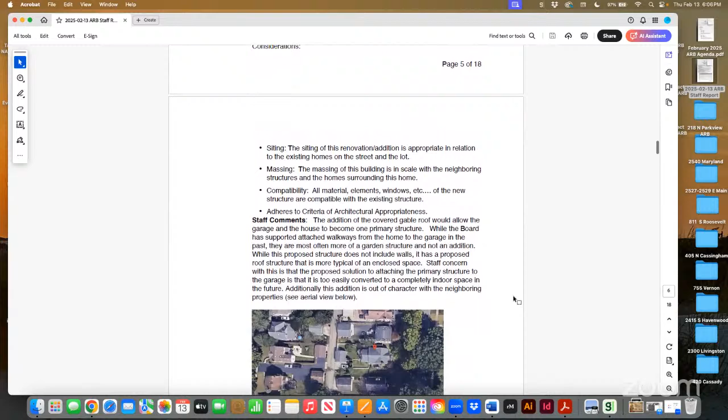Okay, on to new business. Our first order of new business is application number BZAP 25-4. The address is 811 South Roosevelt. The applicant is Eric Kramer. The owner is Katie Sells, and the applicant is seeking architectural review and approval and a recommendation to the Board of Zoning and Planning for a certificate of appropriateness to demolish the existing deck and rebuild, replace the walkway with concrete, and build a gabled covered roof from the garage to the home.

Is the applicant here for that? Thank you. And can you be sworn in, please? Can you state your name and address, please? Your address is fine, business is fine.

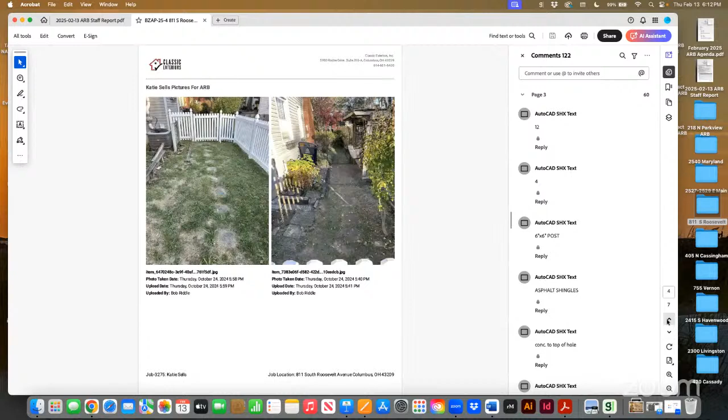We could do, even if we were allowed a solid roof, we could detach it at the house or the garage, which would separate it so it's not an attached structure. Just use 6x6s for the post and the same for the beam, but give her an actual roof that stops the water.

Karen, can you explain why this has to go to BZAP? What rule is this breaking that it has to go to BZAP rather than just in front of us? It would need a variance because once you attach that structure to both the primary house and the garage, it becomes one whole primary structure, so it would need a rear yard setback variance.

What if we didn't attach it? What if we put the cover over the deck like you explained, and then off of where the steps came off the deck, we just put a covered breezeway through it that wasn't attached to either structure? Then you wouldn't need that, and you wouldn't be going to BZAP.

Okay, but is that a better design, or is it just easier so you don't have to go to BZAP? We would prefer that you not, because we'd prefer you not have a variance. I agree, I'm all about simple. But even architecturally, that kind of goes along with our discussion — that could be the result of a better architectural solution.

Exactly to your point — you wouldn't need to if it's not attached. Do you want to speak to that? I would need to check the accessory structure code just to be sure, because at that point it's multiple accessory structures in the rear yard — you'd have the garage and then an area variance situation, yeah.

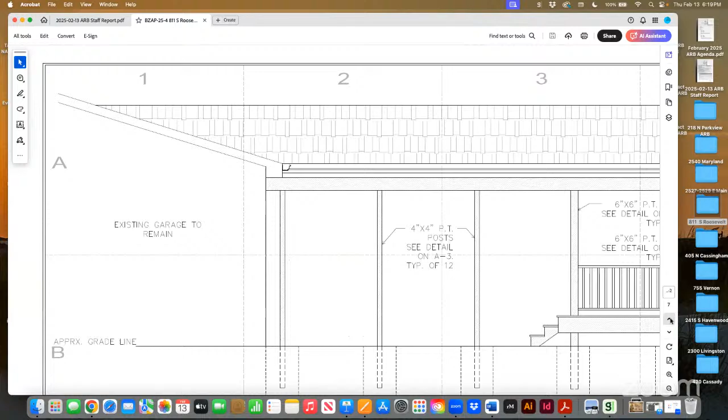Can we have that put up on a screen? I can't see what you're talking about — can you go to that, which one, can you do both? So here, your columns come up and hit a horizontal band that looks like a beam, and your fascia and gutter sit above that.

If you go to the next page, top left detail, your rafter is coming down, sitting on the beam that the column is hitting. And your fascia is lower than that horizontal beam, with the soffit there, and nothing below that but posts. So the elevation isn't representative of that detail.

Though we are going to see this detail again, I think it's a standard detail in your library — it's probably a good detail. It looks like it's a bird's mouth rafter sitting on top of a beam that just has the soffit running straight back.

I'd be interested in — I mean, this doesn't have to be an ornate structure, and we certainly wouldn't want the columns to be ornate either.

But I think the details of those are important. They need to match the existing house. So I would think that we probably aren't putting soffit on it. That was good for you to point out to me, because it's not a house. You wouldn't put... well, I don't know what you're doing. Basically, you're covering the bottom side of the rafters and enclosing the soffit, venting it. Yeah, I don't think that's against the post, probably more than you need, but that soffit would actually go to... for me, it's just trying to get into a set of drawings that represents what's going to happen. I know you have another go around of design. Yeah, we can pull the soffit out for sure, 100%.

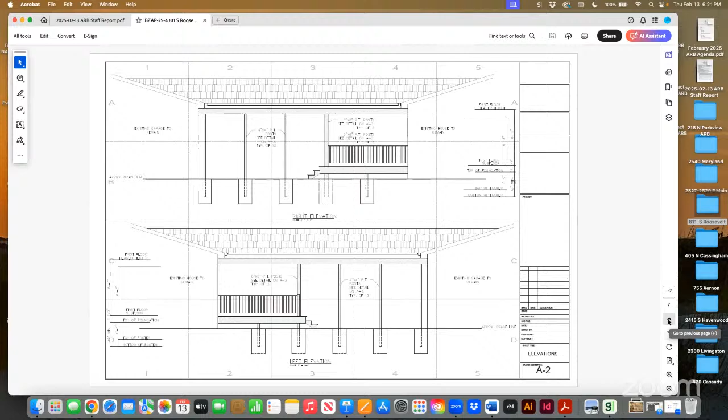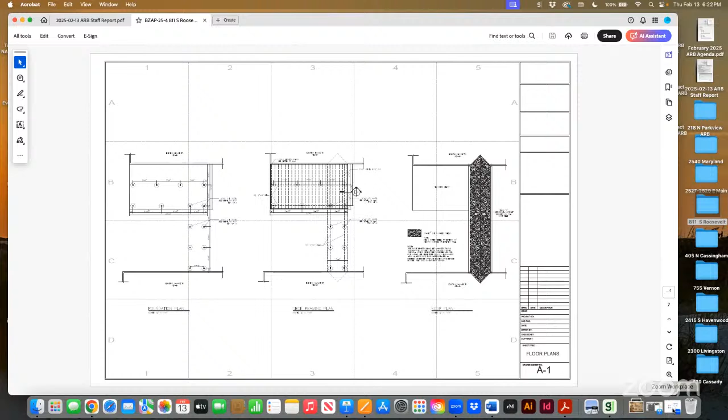So on the idea of, I agree with what Mr. Scott is saying about the drawings not jiving with what your intent is here. The drawings don't reflect the higher house to the lower garage. They're showing the eaves equal and the roof coming over equal and all that, which I know you'll revise. But why not think of it like a porch off of the garage? You can create a covered porch off the garage. It could be a gable form, it could have your piers, and then you build a porch over the new deck. The proximity of those—they're 10 feet apart—but the amenity of having this porch at the garage might be beneficial for the pets, or even in resale, to have something like that. I think it would be great. And the same thing with the deck: you reorient the deck, you make it safer, you have it covered, and they're 10 feet apart. It seems that would be to your client's benefit.

So it seems to me that it's probably going to be the way I need to go—build a studio roof over the deck, maybe do a gabled roof coming off the garage, and possibly do like a trellis in between the two. Freestanding. Yeah, freestanding, or a pergola.

Also think about the weather. If you're 10 feet apart from one porch to another, how much weather is really going to affect that 10 feet? If it's a downpour, okay, but otherwise you're not going to have wind that brings snow and all that—it's such a small area to deal with. I don't know that you really need to connect the buildings, unless there was some metal structure that conveyed people who were handicapped or something, where it had to be protected. But this, to me, at that point is more of a convenience—architecturally and zoning code-wise, I don't think it's going to fly. I would just try to convince them to have the two and keep them apart.

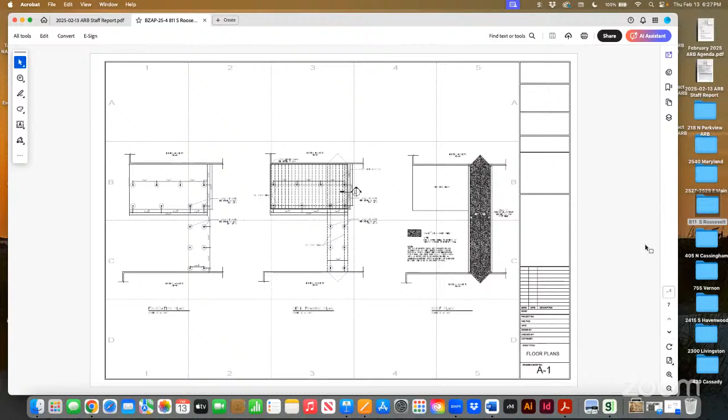This covered walkway, if I read the sketch site plan in the back correctly, looks like it's dissecting right down through the middle of the yard. So having something with a little bit of mass to it, a solid roof, is really going to put a separation between one side and the other. The owner needs to recognize that if that's okay or not okay.

I think expanding, it's kind of a simple solution. I think if you put a trellis-like structure over the entire porch, whether it has a roof on it or not, it can be a single slope with a little bit of a metal roof on it or something. I think that could be explored with an open trellis that's not connected to the porch or to the garage, extending between the two.

And just be a very light, elegant structure. And then it doesn't necessarily divide one side of the yard from the other. And then the paving you use along there could be brick pavers, could be concrete. But even exploring some creative materials to use there.

I've got grave concerns about just this gable roof that's going between the two, and then these little small columns supporting it and everything, and how that's really going to come off, and whether it's going to truly be successful or not. So I would tell you to go back and explore it a little bit more creatively.

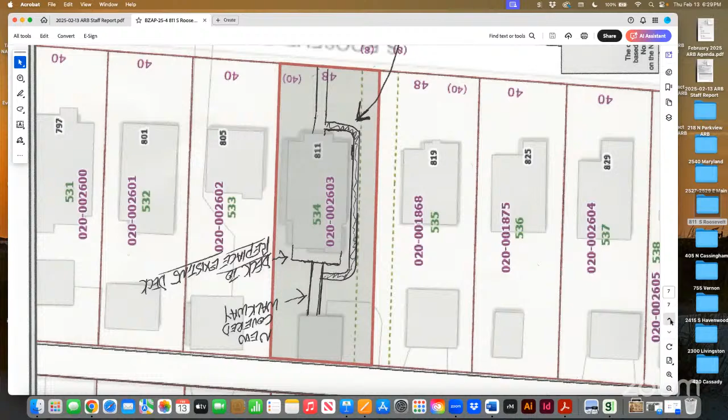Excuse me, yeah, the elevations are totally different. And it is not represented correctly in the drawings, but we will go back and make those changes.

Cool. And I agree that a straight shot roof from the house to the garage is probably not going to work for zoning or the architectural board. So I think what I'm going to do is go back and talk with the homeowner, and then we're going to redraw it to bring the porch roof out to the edge of the deck, and then build something off of the garage, maybe some sort of pergola or arbor in between the two that's not fully enclosed on the roof.

Okay, and I think she would be okay with that. We'll find out. Mr. Calhoun, are you done? I am.

I don't have anything else to add, except I ask that when you come back, can you do an accurate site plan? Because not only does that drop off, but it's angled. And trying to do that gabled roof at an angle, I don't think what you drew would have actually worked. But an accurate site plan will really help to see how your walkway can go straight from porch to porch, but not from door to door.

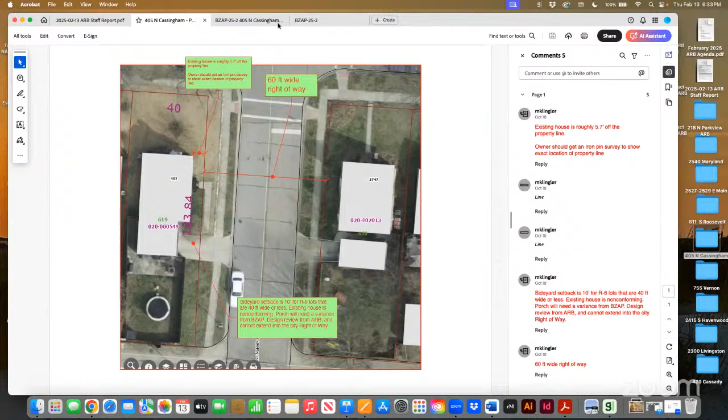Is the applicant present? Please come forward and get sworn in. State your name and address, please. Blake Floyd, 4895 West Jefferson, Kysville Road, London, Ohio. Do you swear or affirm the testimony you give this evening will be the truth? I do. Thank you.

Okay, this application is before us for the first time in front of this board. It's complicated because of the way this house is sited, and Matt, you can speak to any of this, please just cut me off if you'd like. It will need a recommendation to go to BZAP, and then BZAP will need a recommendation to go to city council. And we don't need to get into this, but I just want to set the whole picture for all of you.

At city council, they will need a release because it'll be, oh no, we're not in the right of way anymore. Yeah, we just, we are. So a bit of the overhang is. Consent hold harmless. So if anybody has any questions about that, Matt can answer, but we'll just be here talking about the architecture.

I have no issue at all about putting a front porch on this, covering over the front of this house. I think it's something most owners want to have. I've worked with the applicant since this was first applied for as an ARB application because there was not an understanding about the variance needed and the hold harmless it needed. So I've worked with the applicant back and forth on updating drawings, which were not correct at first. The house was drawn incorrectly, and I still think there's a little ways to go on the design.

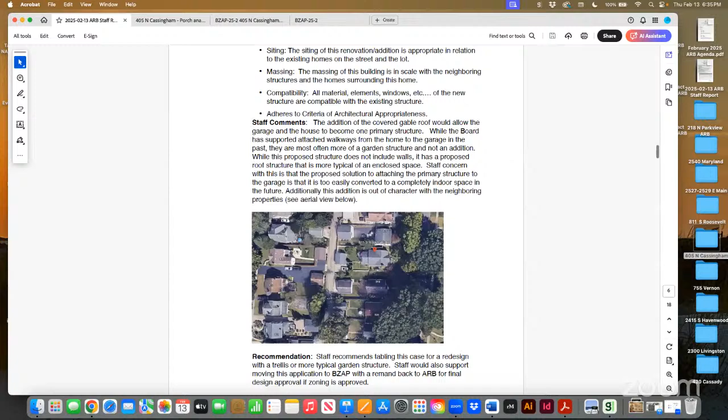I'm going to go to the staff report for a second. On the original application, I wanted to show you the house in context, which I don't believe there were photographs submitted on the second application, but it doesn't really matter. I put them into the staff report so everybody can understand how the sidewalk works, how the stone wall works, how the grass works, how the public right of way works. And we don't have a good drawing of that.

I talked to you today, didn't I? Or yesterday, about the site plan. To make sure that Blake understands that it is Blake, correct? Correct, yeah. We're going to really need that for both zoning and for city council. I was hoping to have it for today, but I tried. You're right, okay, but I think that's really critical. And that's one piece of information that we don't have here, is the site plan that really shows where the columns land in relationship to the sidewalk and the grass and the wall, putting aside all the variance stuff that's needed and the hold harmless.

I still think architecturally, we need to understand how this sits in relationship to that little stone wall that's in front and to the sidewalk.

Are you changing the sidewalk at all? No, pretty much, related to the pictures, this sidewalk is what I'm talking about. So really, it would come off the house, where the stairs are for the existing concrete. It would be roughly 3 more feet. So it's going to come pretty much, it's going to split the sidewalk in half. It's going to land right on the sidewalk in the middle of it. But you're keeping the sidewalk where it is.

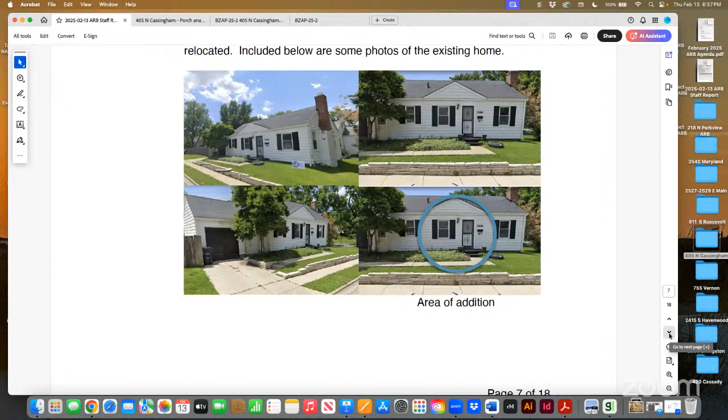Yeah, so what it is actually, you can see where the gable is, that's how wide we're going to make the deck and the porch, is how we're planning on it. So right there, pretty much from the left part of the gable to the house, all of that concrete is getting torn out. So she's only going to have a walkway from her driveway to the deck, because that's where her... I see what you're saying. Yes. Okay, so to the point, that's not clear without drawings.

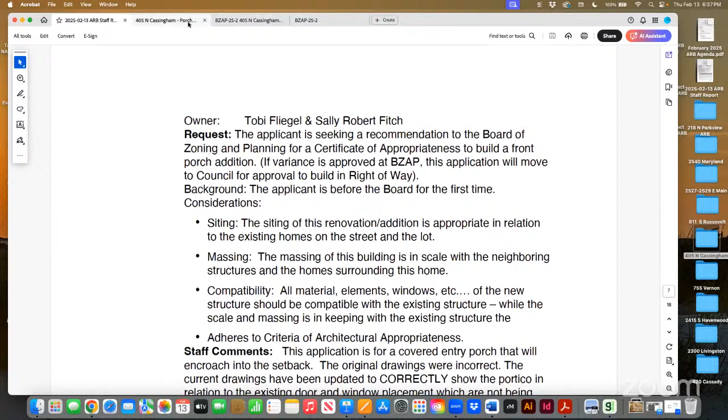Actually, there's the updated one. I also wanted to show the board this, not that it matters here or there, except it kind of does, because when we talk about the style of it, I do think you were planning on doing cedar, correct? Correct. And I do think the cedar would look better now that it's blue than if it was white, but that's just a subjective comment. But I think there's some issues about the eaves and how the treatment of the plans are that need to match the existing house as well. But my bigger concern right now is just understanding where this falls in relation to the site plan.

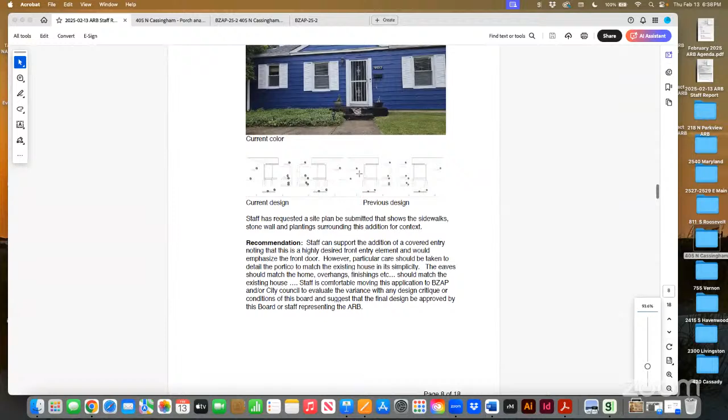Yeah, there also are, and I'm sure you probably want to talk about this for a second. I did kind of cut and paste into my staff report the previous design. The overhang seemed to be kind of proportionally more correct, but I think you wanted more.

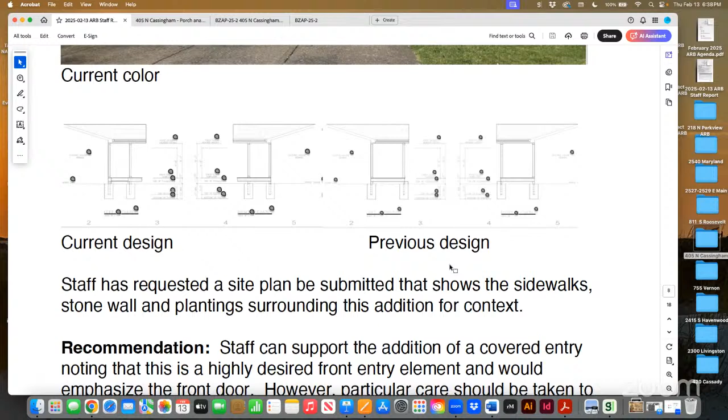Yes, so previous design, which you guys can see, long story short, the issue is she's on a corner lot. So the city right of way, she technically only owns 5.7 feet off of her house. Well, she's wanting her covered porch to be a standard 8 foot off the house by a 15-foot wide to match the existing gable that's there. So as you can see on the previous design, we just kind of had it as, hey, it's going to be 8 foot. There it is. Well, after speaking with Matt, we would bounce some ideas off one another, just to try to help with the council part of it. I think zoning would be the next meeting or whatever.

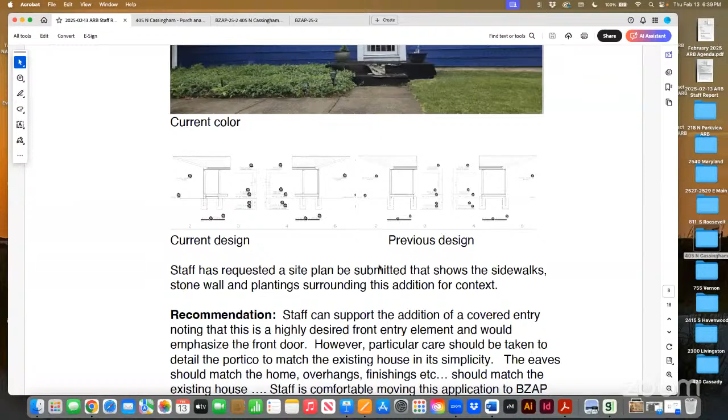We were trying to keep, as you guys can see, the footer, the post that would hold it up, actually in the ground. It would be in the right of way on the right-hand side. So what I did was change it on the left-hand side so the post would be on her property, out of the right of way, and the deck would just cantilever or hang over. It'd pretty much be floating, so it's not actually in the right of way.

I wanted to include that because I think for any of you that looked at what was posted three weeks ago, you might be a little confused. So that's the update, and that's the reason the columns are now inset.

We just try to help with the zoning portion, I guess. So let me see what else I have, and then I'll leave it to the board.

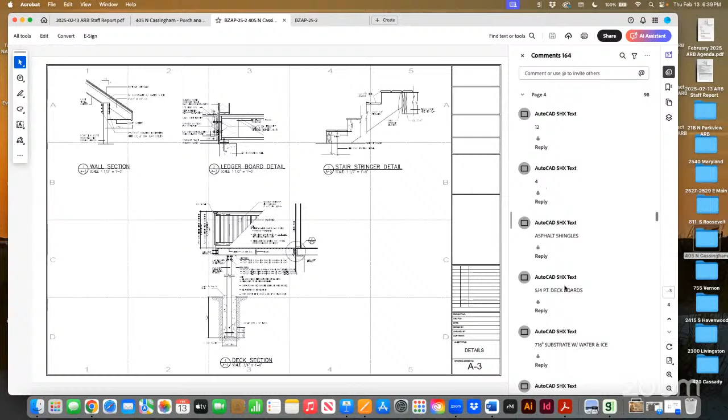Those are my concerns. I have some concerns about the design, just making sure the details of it match the details of the house. I do agree the columns can be simple, but you may want to—I'm happy to work with the applicant on beefing up the columns a little bit. I'm gonna hand it over to you guys.

Okay, is there a board member that would like to go first? I'll go first. Can I ask who drew these drawings for the porch? Who drafted these drawings? My architect did. Your architect did? Yes. There's no name on here of your architect? Is there not? There's nothing. Okay, they look exactly like the last application.

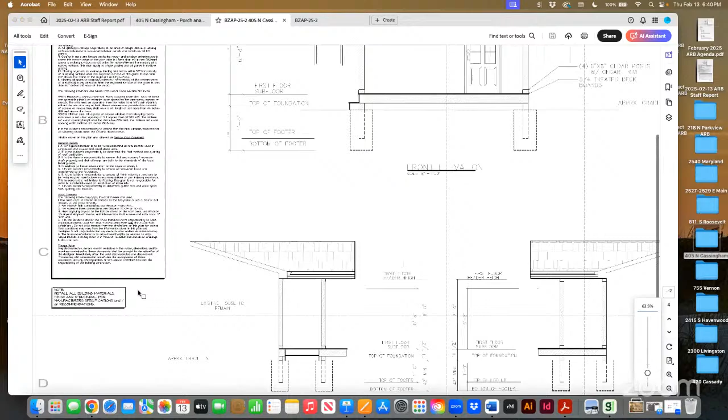The same architect? I think he does use my same architect, which is funny. When I started seeing his drawings, I was like, that looks a whole lot like Kevin. And the guy's name is Kevin, the architect. That's why I started this. But he doesn't have a title block or anything, there's no indication of who the architect is.

Or address or anything, yeah. I'm sure there's an app out there where you can do this and draw it up. Somebody could draw it up. There's no place for a stamp, so anybody could do a drawing like this with an app. I mean, heck, we're on the verge of AI for architecture. You're halfway there already with technology.

So these details are pretty much the same as what we saw in the last application for a porch. The way I see it, if this was a back deck like the last application, I wouldn't be as critical about the details, but this is a front porch.

The way it's been detailed in these drawings is not for a front porch. The house has a certain amount of character, proportions to the windows, siding, shutters, details for the gable at the front, all of that. The way this porch should engage that is by respecting it—meaning using real columns or real piers that have character, instead of just 6x6s wrapped with trim at the top and bottom.

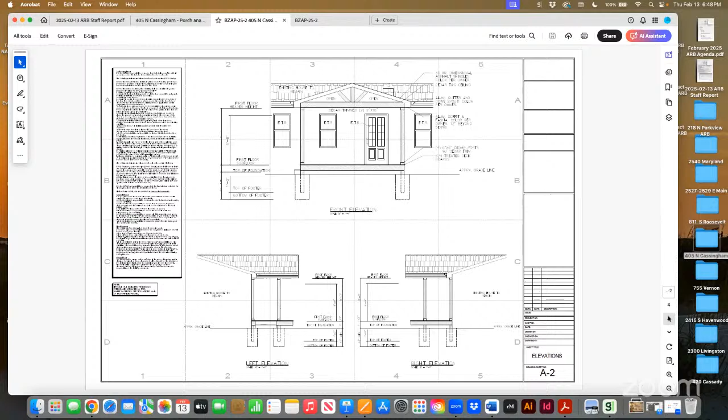But I think the thought was, how does this work? Potentially, if there's a sidewalk or if the city has to come through and dig something in the right of way, something underground that's attached to the structure, they could cut off the front of that porch if it were up in the air. But the whole right of way extends all the way up. So what I was going to say is, I don't think I quite understand what he's being pushed here to do. If the idea is to stay out of the right of way in the ground, but if you're floating above the right of way, that seems to be a little more acceptable.

Okay, that's the path we're going down here, right? Either way, you need a consent hold harmless. What's your experience? I don't think you're going to be able to build in the right of way. That, to me, is an effort and a half.

Me and Matt have both kind of told the homeowner, and she's kind of like, that's what she wants. And if she can't have that, then she don't want nothing at all. I've seen this situation a couple times in my 25 years here. It's just not something that happens, because it's putting a lot of liability on the city and on the owner. Whether you're floating above the right of way or in the ground in the right of way, it's still an issue.

It is. We were just kind of bouncing ideas off one another, trying to help with the next steps, where we're not actually in the ground. But if you're not in the ground, it goes against what Matt just said, that you can't come in and just slice the front of this porch off and get into the ground in front of it.

Based on what I was saying, come out from the house, pull the columns out, put a skirt or something around the bottom of this so they don't see where the bearing is. Which we then planned on skirting it, which kind of helps with this odd looking condition that you have with the cantilever.

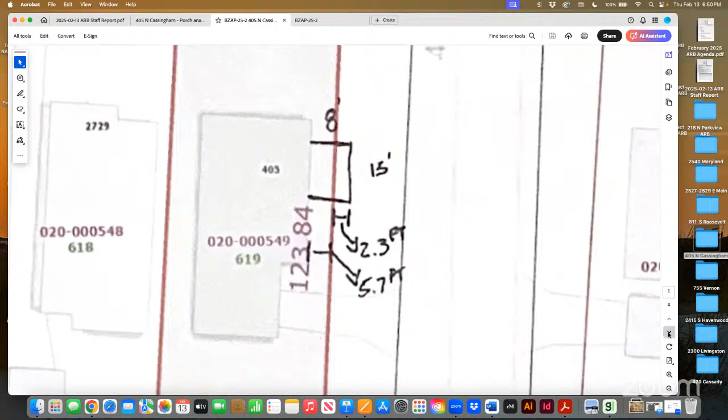There's a lot of things to work out from a design perspective. There has to be vast improvements for this to get approved from my perspective, to get my vote. It just doesn't meet the guidelines established here in Bexley. I think you can go back and explore some of that and get there. I think this right of way thing needs to be sorted out, because this cantilever piece, this architectural idea, is going to take some significant creativity to really make work.

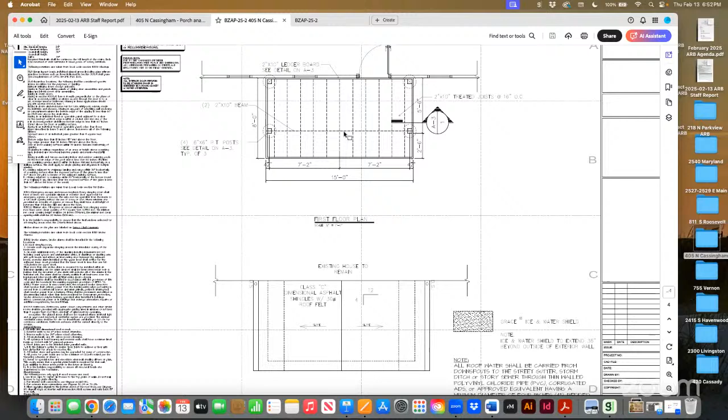And I think there are plenty of examples. A drive around Bexley, you'll pretty quickly see, oh, that could look nice, something along those lines. Stone columns, something bigger with the wood, the openness and the dividing of the beams in the top that just doesn't feel like a front porch. So I think there's some design opportunities here to really make this, even if it's smaller than what is wanted, feel like a nice front porch.

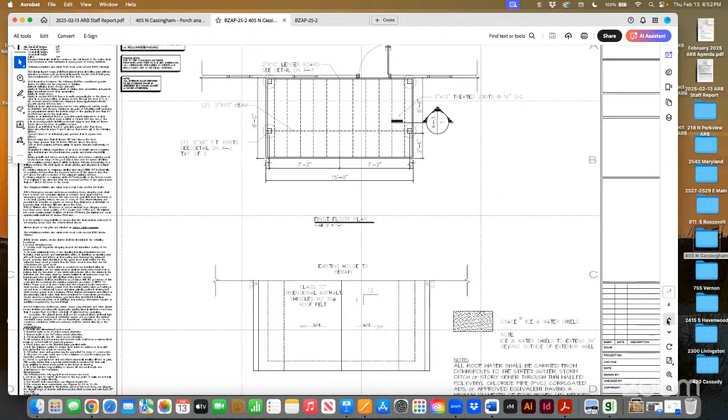If I could add anything, I totally understand and agree with what all of you have said. Keep in mind, a lot of this was literally what the homeowner sent me, and I'm just giving her what she wanted. I'm trying to make this work, and a lot of it is to budget. This is what she could afford. She found this somewhere and sent it to me and said, hey, this is what I want. Right, the open look with the cedar. Not that I was trying to disrespect Bexley's look, this is just what the homeowner wanted.

I completely understand that, because she may have assembled a Pinterest board and said, oh, I've collected 6 pictures, this looks nice, what can you do with this? And then I think maybe going to your architect and either coming up with something and going back to her and saying, listen, what you wanted is not going to fly, and here's why. However, what we have come up with is something that we think may work, what do you think of this? So I think that's probably a better discussion to have with the client.

Agreed. So one other comment, sorry, but one thing maybe to explore, and it's just going to bring more money to the project, but could the front entrance be swung around onto Columbus Avenue? You're saying, could you build the porch facing Columbus Avenue? I don't know the floor plan of the house, and bring the entrance off on the face of the building to align with stuff going down the other side of the street. But then you'd have to stay out of the right of way. Yeah, but on that side of the house, as of now, it's just a wall. There's nothing there, so I guess in essence, could we add an entryway over there?

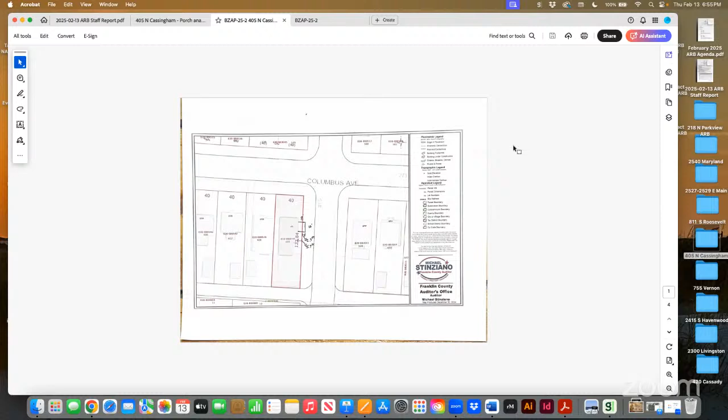So I think you should stay out of the right of way completely. I also couldn't support the design the way it is, with the cantilevering aspect of it. I don't think it's appropriate. I think it's architecturally going to be very difficult. I don't think your architect has at all thought about how this is structurally put together. Even looking at the floor plan, first floor on A1, he's got the columns, which are really piers, against the side of the house with the foundations going into the inside face of the wall, which is not possible. He has two 2x10 beams running parallel to the exterior facade, which implies that it's below the actual 2x10 treated joists for the deck.

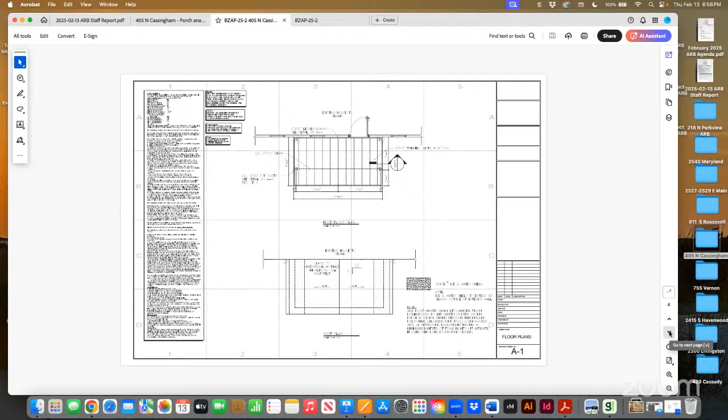But in elevation, it's all kind of in the same plane, which doesn't work. So that beam is going to be at grade or below, which I think is a problem.

I am in full support of having an actual stone, CMU, or brick deck or porch foundation that a wood deck could sit on, with a solid base underneath. I don't like decks as front porches in Bexley. I wouldn't be able to support that.

I know this is a unique condition because it's got two fronts, but looking at the option of doing a front porch on the other side of the house is a great idea, and would be very appropriate. There are many houses in South Bexley with front porches on the side. I think it's on Charles, or maybe Astor, where they put a brand new long porch along the side of the house, and that worked. I don't think they have right-of-way issues there, but that's what they did.

So it can work. And then I get to the elevations, and I'm confused again by the details, which I hinted at in the last application—at least 3 of the 4, maybe all 4. I don't see how, with the columns being offset from the edge of the gable, this is structurally supported at all.

I would anticipate there would be two beams coming out perpendicular to the facade that the columns would hold up, and then those holding up rafters that hold up the gable. In this scenario, you have a beam going across between your outside columns, and nothing's really holding up the gable. But it looks like it's an open truss.

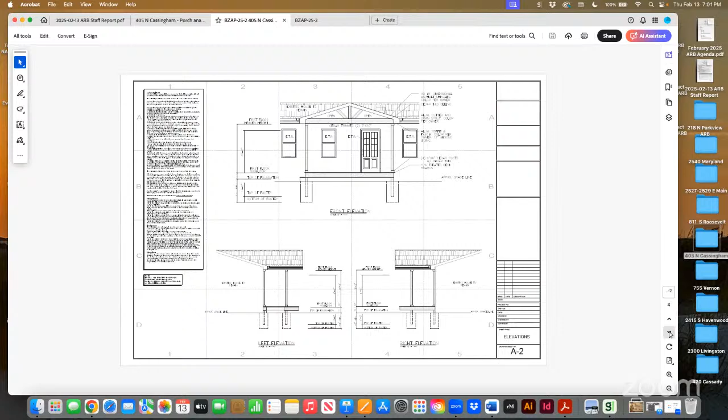Okay, we will now go on to old business. Our first application in old business is BZAP 24-49. The address is 2300 Livingston. The applicant is Bill Downing and the owner is Bexley Apartments LLC. The applicant is seeking architectural review and approval and a recommendation to the Board of Zoning and Planning for a certificate of appropriateness to demolish the existing structure and build a new 3-story residential multifamily structure. Is the applicant present?

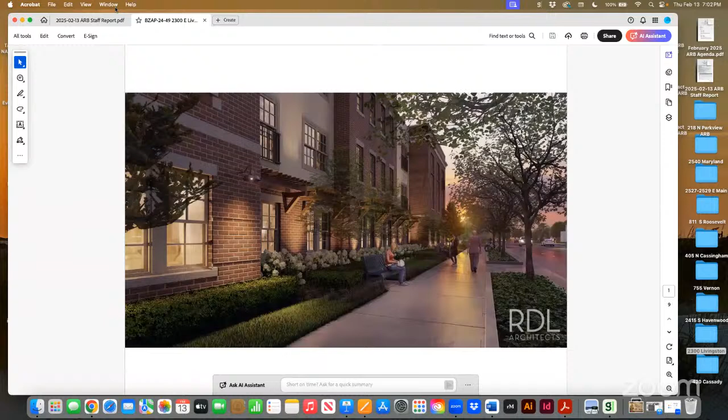Today I received an email from Tim Madison regarding the lack of public notice for the 2300 Livingston Avenue and 420 North Cassady applications. Because these are BZAP applications which have been remanded back to the Architectural Review Board from BZAP, and the Architectural Review Board is not the final decision-making board on these applications, public notice is not required, as the applications have already been noticed. However, because this is a project with much community interest, I recommend to the board that after giving feedback to the applicants tonight, the application be tabled until the March 13th meeting so that we can mail out public notices tomorrow to ensure the community has ample opportunity for input on the project. That's my staff recommendation to you all. Just wanted to share that.

Thank you. Okay, so please come back up. I'm sorry, that was just a little side note. Okay, so I know you have made some changes from the last meeting, so can you please go through and explain the changes that you have made since the last meeting?

Do you want that slideshow? Sure, that'd be great. Okay, and maybe we'll do this in two parts, because I think there was some feedback we heard that was a little more general in nature and relates to discussions held at the subsequent BZAP meeting, so I thought I could address those on behalf of the owner. By the way, we haven't met before. I'm George Tebbett, I'm from the Community Builders. I think you were gone last time. I was. Everybody else, I assume, remembers us. And this is our architect, Kevin Dreyfus Wells from RDL. I'll talk briefly about the BZAP and the questions it addressed, and then let Kevin take over on all the design stuff.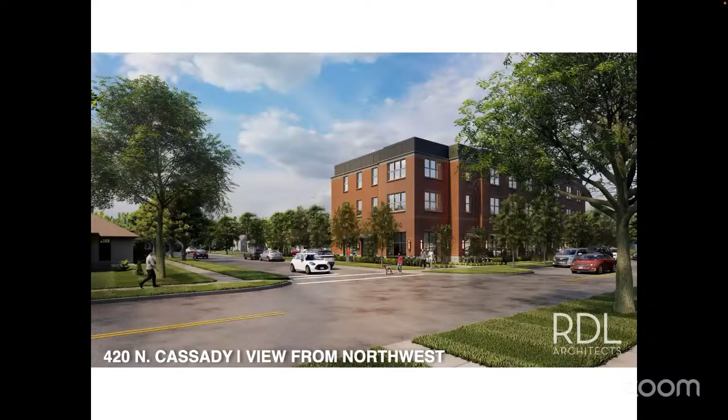I assumed so, however you like. That's the one I just read. Yeah, I thought that's where I heard something. Oh, he talked about 2300, so I assumed that's where we were.

Great. So we heard loud and clear your comments and suggestions, and have made some pretty substantial changes in a number of locations. We really tried to listen carefully and respond to all of those. I think everyone's familiar with the context—other than that we are surrounded with residential properties to the east and southeast, so we're sort of in line with that. Obviously, as we talked about last time, we do have a constrained site. We have a minimum program and yield that we need to meet, including certain unit types.

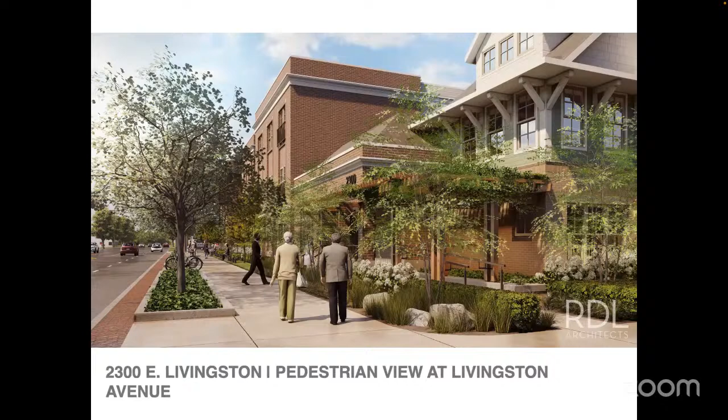This is the proposed building entrance. As we get to the plans, we'll see, but we've taken that corner unit, and there were some questions about the proportion of that. We've pulled that back and widened it so that it has a much wider proportion when viewed from across the street.

It sets back and gives a little more room to that front entrance. We've taken that front entry element, which was previously kind of a continuation of the Francis Avenue architecture, and given an identity that's really much more in line with the character as you move west down the street, matching that same brick and trying to make it more of a transitional element. It's gotten taller, with brick piers there.

And then we've extended that entry experience over that open space with a pergola. That pergola continues in a very similar character as you go all the way down the street. There's about 100 feet of pergola trellis as you go down, trying to bring that down to a human scale.

We're being very intentional about lighting, to light that first floor experience in the evening. We've added a tree guard type element along the edge of the sidewalk with posts and a chain, which is an element coming out of the Main Street pattern book.

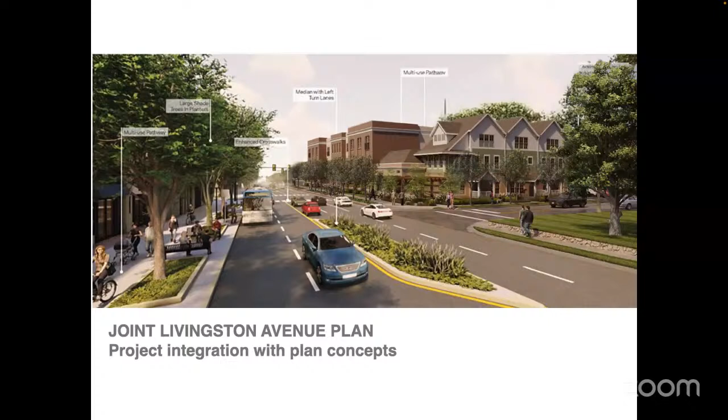We did want to address the question of how this fits into the joint Livingston plan. This is the page from that plan that kind of captures that streetscape character, although not in this location. In the next slide, just as an illustration, we dropped our project into that streetscape. This is obviously a kind of crude collage, and we know that doesn't occur at this site, but we wanted to at least show that streetscape character.

We don't know what's going to happen across the street. That's out of our control. But this is how that fits into that Livingston streetscape.

The overall floor plan, in terms of the number of units and their arrangement, is fairly consistent. But again, at that corner, we pushed that townhouse type unit back and broadened it, which you'll see in the elevation. And move on.

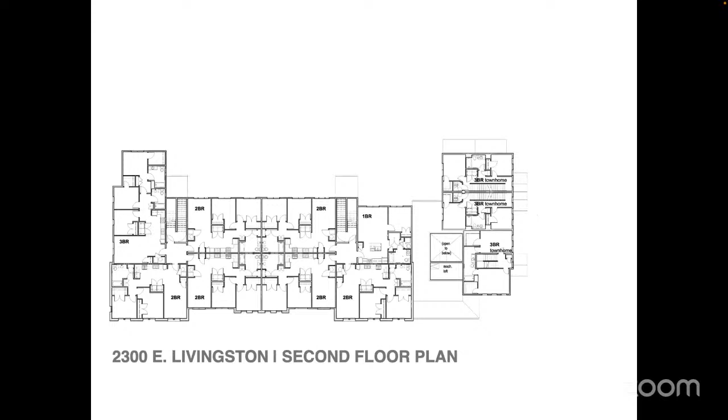Between the two end caps, as you've seen before, what was previously kind of a continuous expanse of siding - we've pulled out that middle element and changed some window patterns. We've also introduced Juliet balcony railings at the living rooms of all those second and third floor units.

We had previously had a brick arch there. You can see we've treated that differently - we stepped the wall back a little bit so that we really have three very similar units of geometry. We've also expanded those third floor window proportions at the top.

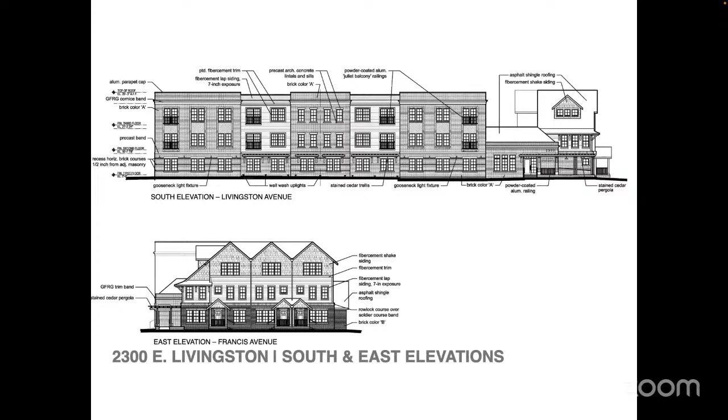Anything else? I think that covers the primary changes.

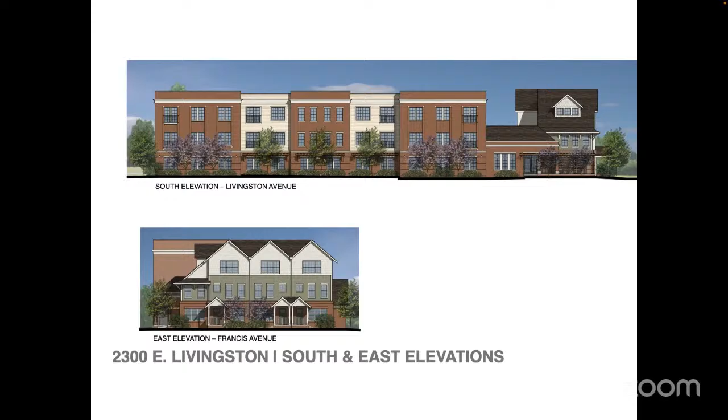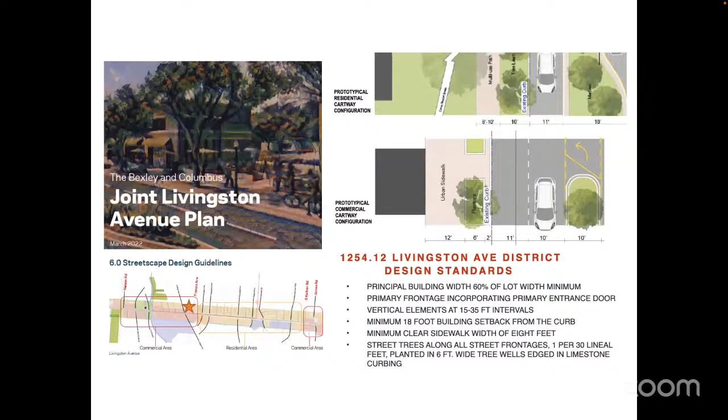I want to say, I think the design is much better. I appreciate you pushing for something that is compatible with the neighborhood. I do appreciate that. Can you make the bigger piece bigger?

My questions are about the parking and fencing next to our property. Because you probably can't tell, but the whole property line currently is all the same level of grade, there's no change. But as you go back to the end of the property, there's a big grade difference. So when you see all those cars facing our property, which is not very wide, it is deep, but I have some concerns about our safety on the other side, especially where the level of the ground is the same.

When it's different, I don't really have much of a problem. Currently there's a tree, and the grade almost to that second tree is completely different. Right now there's a garage, and the grade is completely different there too—significantly different, so it adds an extra layer of safety. But when I look from that tree in the middle over to where we come out of our house, it's all even.

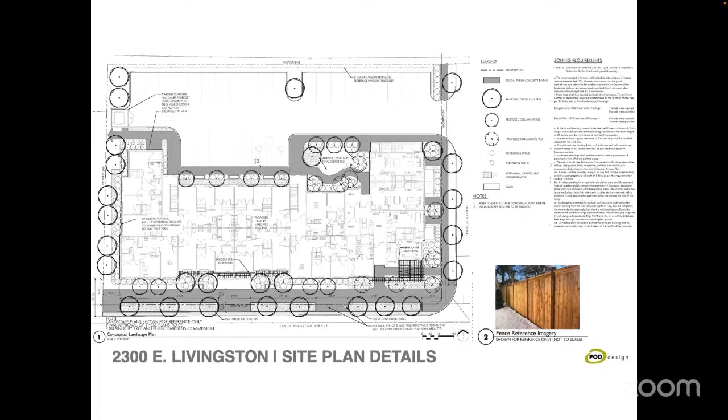Does your driveway line up to that lot line? You're not showing it at all. Yeah, that's our entire driveway. It goes to the garage. I think you can see the garage right here. Keep going. Right there. Gotcha. That's helpful, thank you. I think you really need to see the whole context.

No, I really don't, and the back part, we generally do gardening and not much activity. But we call it the three yards: the front, the middle, and the back. So in the middle we do a lot of activity because it's a nicer area. So I would want to be protected, and I don't think I should have to come up with something to protect ourselves, but I will if I have to. And I'm just wondering, is there something we can do?

Okay, thank you. Is there anything else? Yeah, I was wondering what kind of feedback I might get. Well, I have to go through all board members and stuff, so we won't come up with an answer for you right now, but we've taken down your concern and we will try to address it as we proceed. So, thank you so much. Okay, thank you. Appreciate you.

Okay, is there anyone else in the audience that would like to speak about this application? Okay, I will go to board members. And is there a board member that would like to go first? Nobody's making eye contact. I'm picking Mr. Hall. Fine.

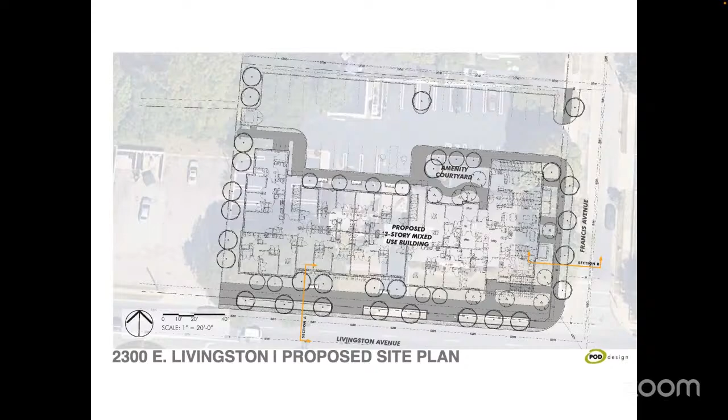I would say that you have this 8-foot wood fence going around the perimeter, and all it takes is somebody slapping it in reverse, hitting the gas pedal, and slamming through it. I don't think it's realistic to think that somebody's going to have to go back and forth two or three times to get through it. I really don't see that as a justification. I don't know if that would occur or not, but I think with her residence being next to it, that needs to be addressed.

A quick clarification - I may not have said this as clear as I meant - but in addition to that fence, there is a 6-inch high poured-in-place concrete curb at the edge of that pavement. So how often do you see cars that pull up in front of a building and then all of a sudden they're inside the building, never really 20 feet away getting 60 miles an hour to get in? That's my point. They can jump the curb and go through that fence and end up in her side yard. So I think that wall needs to have some structural integrity to it - that's my point. I don't know what that is, but you all can figure that out.

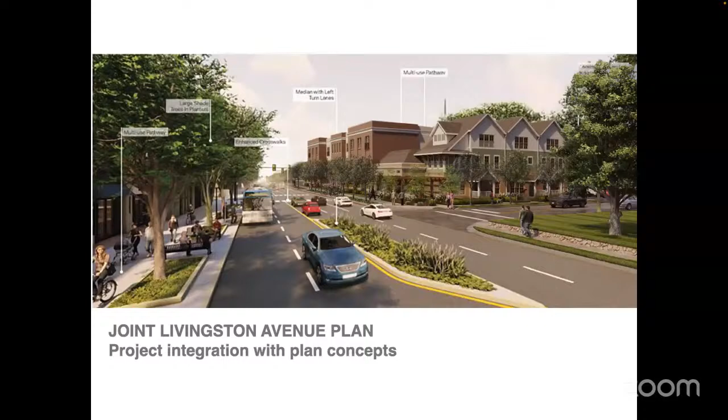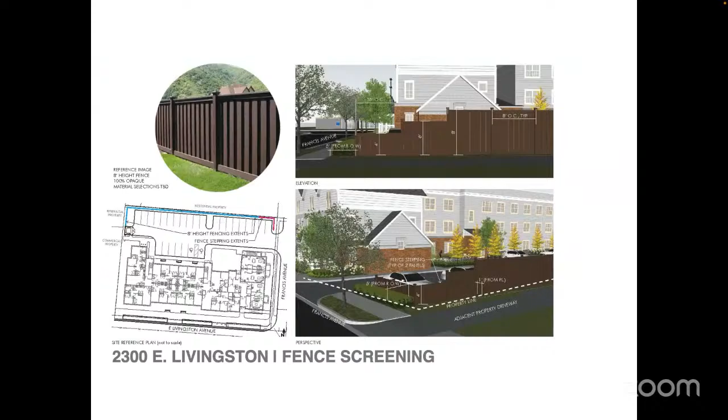What I would suggest, if we could go to not the joint plan view, but the other perspective view, the next one. Well, now I get back, there's another one. Just the main three-dimensional view of that. Must be back at the beginning. I think you'll find it towards the end. I'm looking at the... different, it has RDL in the corner. There you go, that's the one.

Okay, so I don't think we ever had any issue with this. This, to me, feels good. I like the porches. I like that you got rid of that strange brick arch thing that was there, it just felt sort of uncharacteristic. These do feel a little more Bexley-like. It's all about the details at this point.

We don't want it to look cheap, so that's going to be a lot of detail work with the design consultant. I would really like to see this again, honestly, because I'd like to see those details expanded and elaborated on. But this is not resolved.

What I would suggest is that you actually consider doing a gable form on this elevation, not trying to create this dormer, this sort of bungalow style dormer up here that just feels very strange, as strange as the large sweeping roof you had before. So if this could turn into a 3-story gable where it's not quite something like this, but you're turning the corner and now you're starting to relate to these things, even though you're going to have clapboard, you're going to have gables, but all of this crashing, it feels like I'm...

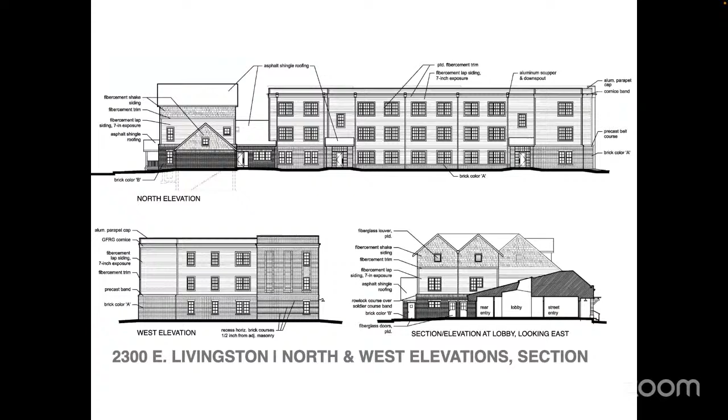A7.0, I have no issue with those here. So here you have this lovely brick detail wrapping, but then on top of it, you put a stone sill. That's odd. It's more material than you need for a detail in a sill condition. Either you make this stone, transition from a rowlock brick to a stone, and pull this up a little bit so it's right under the window, or you just eliminate the stone and get the window down to the brick. But the two of them together doesn't make any sense.

Our reason for doing that, and our preference, is to provide a projecting drip that doesn't interfere with the consistency of the brick surround. That's actually a detail that the Trinity Seminary building has exactly in that same manner, probably for that same reason, so you don't get that streaking of oil down the brick. But I don't think they wrap this under the stone. They do actually. They do actually. Okay, well, it's very odd to me.

This makes sense right here, but it seems to me that this brick would turn and transition maybe into a projected stone, rather than having them on top of each other. But if that's what's over at Trinity, it just seems odd to me. But that is one of the details that I was looking at.

But the cornice, the alignment at the top and the alignment at some point here, I don't know if it's the intention for all of it to align, but I think in the drawing, if you zoom in, there's a misalignment there of some kind. And I don't know if this is a projected line. So there are some places where I'm looking at things that need to be refined. And I'm not going to spend a lot of time on that because, in my opinion, that whole juncture of the Francis Avenue building with the one story still needs to be resolved.

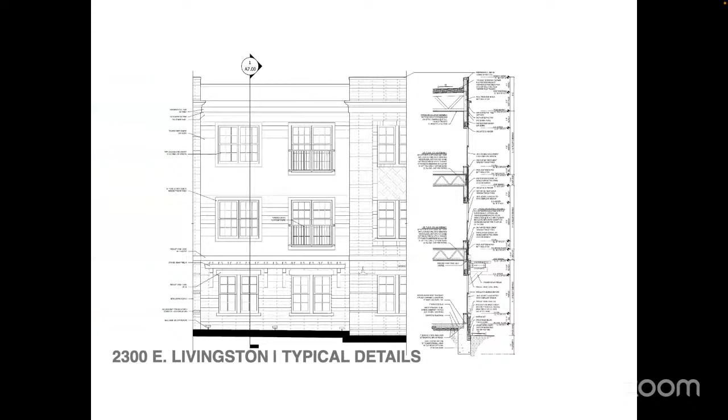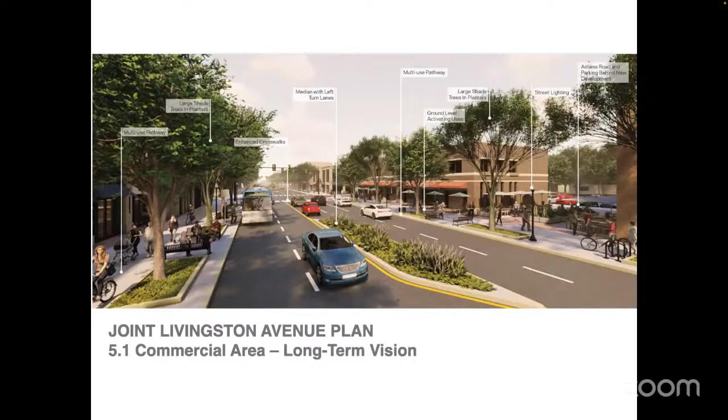Is that just a drafting issue? I think this is the landscape architect's depiction. I think the crown of the street is just a little more exaggerated than actual. We don't really have that scenario; we have the street down and there is a crown to the grade of the street where the middle is higher than the curb, as any street with drainage would be, but it's a 6-inch curb and we don't have any intent of changing that relationship. Okay, that just seemed alarming to me the way it was drawn, so okay.

I have nothing else from that. Oh, I did have one other comment. On the tall 3-story building where it wraps around and you have the connector link, was there any consideration of putting some brick detail or something there that would mimic small windows, just on that high area up there? I just thought maybe some fake windows or something would give you some details instead of that plain brick wall.

We did look at that, and in the relationship with that transition element roof as it currently stands, it felt a little bit squeezed. But I would ask if other board members have any feeling about this suggestion, which I think is a good one to explore - maybe removing that sloped roof element would expose more of that wall and open up a better opportunity to provide brick detailing. That's a great idea. Yeah, I would support that.

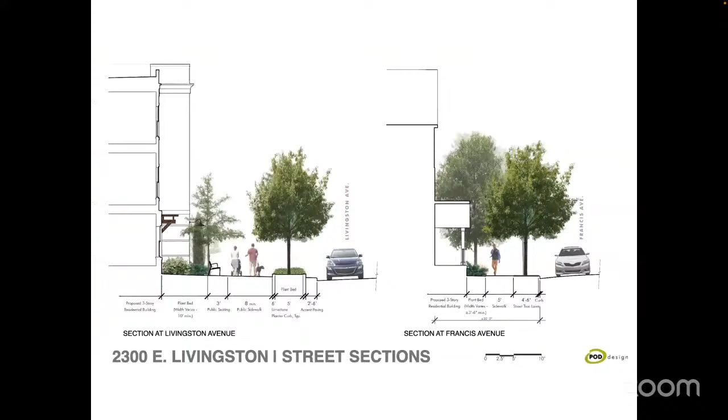Okay, our last application for tonight is BZAP 24-50. The address is 420 North Cassady. The applicant is Bill Downing. The owner is 420 North Cassady Ave LLC. The applicant is seeking architectural review and approval and a recommendation to the Board of Zoning and Planning for a certificate of appropriateness to demolish the existing structure and build a new 3-story mixed-use multifamily residential structure.

Okay, we do not need to swear in because we are already sworn in. So if you would pull that one up and go through the changes that you've made from last month. Sure. The changes in the comments were at a smaller and more refined scale level. Our responses are basically that we've incorporated them, at least as best as we understood them, exactly as they were suggested. We can move through the street views.

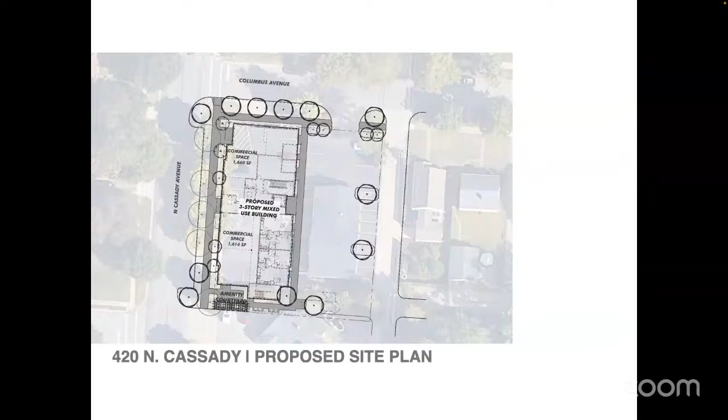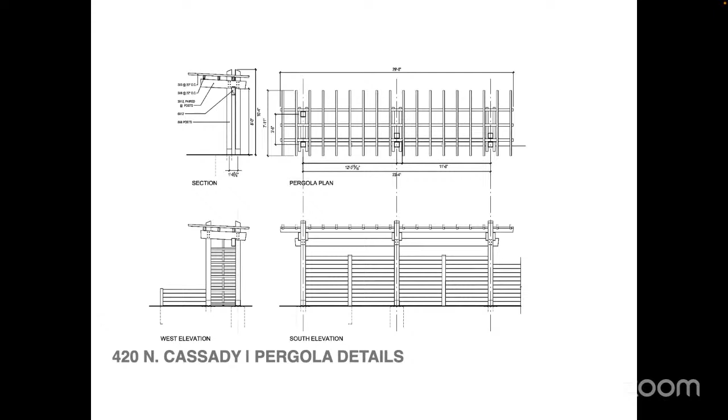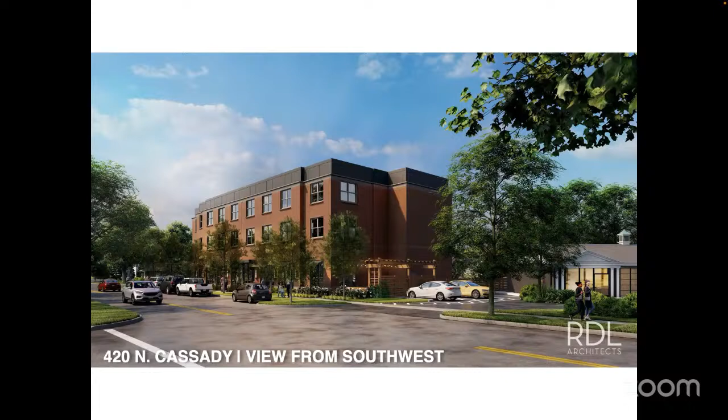We provided a little additional detail on the intended pergola at the corner of that south patio, off what was intended to be the senior center, intended to be stained cedar of some fairly large dimensions. I do want to note that these are the renderings that you saw the last time we were here. We have not updated these, so those refinements and details just didn't really show up until we got to two-dimensional elevations.

We have taken the storefront, where we had a soldier course, and extended that around the window to frame that opening. We're reverting back to the previous detail we had back in 2022. The horizontal belt course had been a single soldier course; that's now a triple soldier course. I think that was really primarily the changes on these elevations.

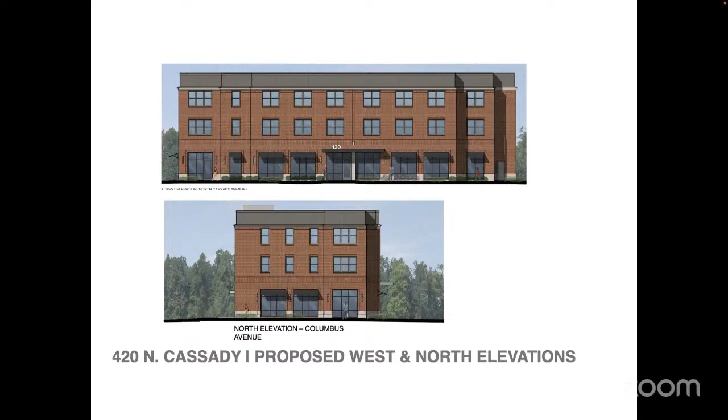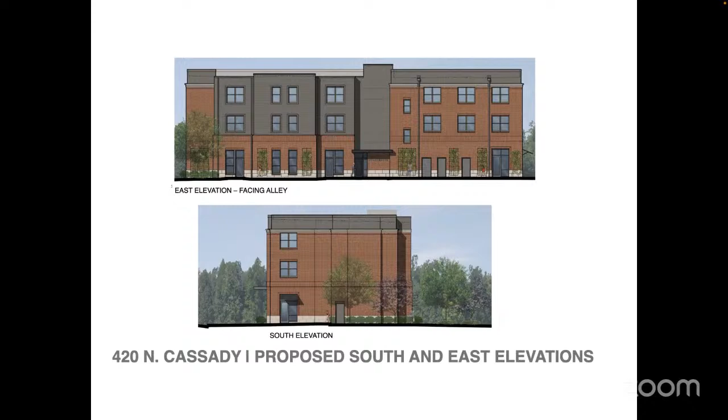Beyond that, there were some requests that we provide details not only of the pergola but of the trellis elements facing the parking lot, and our wall section has details of the intended awnings, which is a powder-coated aluminum frame with a fabric awning - a very simple slope with no free swinging or rigid valance there. We also recall a comment to extend the canopy an additional amount, and we've done that as well.

Okay, thank you. Is there anyone in the audience that came to speak about this application? Okay, seeing no one, we will go straight to the board. Is there a board member that would like to go first?

Sure. Mr. Scott: Great job. I'm in support of the project.

Is there a board member that would like to go next? I'll give you the fastest one. Nice job, Pete. That is the shortest one ever.

I really appreciate the detail that you've added. I love the triple soldier, I love the surrounds on the windows. Really appreciate all that work. I think this is going to be a great example in the future, with the land use strategy plan for North Cassady - this will be a sort of bellwether example for future development up there that will be similar to this.

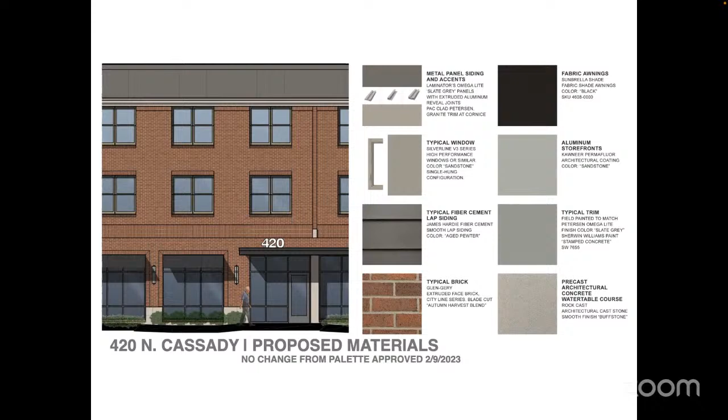This is strange - I won't go into all the history of these projected soldiers over windows, but it stems from an old Georgian look, particularly in Virginia, and it somehow got translated into New Albany, and then all of a sudden everybody started doing it. You'll see these things everywhere, but that is not the way you do a soldier in brick. You will note if you zoom in on that elevation that they're noted as flush. Okay, great.

The other thing is the precast concrete base. I don't know anywhere in town where I've seen that successfully done. They weather terribly - the soft joint between the precast and the brick goes bad very quickly. The masons in town, I'm sorry to say, are just not good at this. I would recommend you do a lighter colored utility brick instead of the precast. There are just too many examples I've seen in Upper Arlington and Grandview where they've utilized precast or even precast stone, and they just don't install them properly.

I'm assuming you're going to have some kind of drip edge down there, made out of zinc or stainless steel, and that thing puncturing through this precast is never a good detail. It looks terrible, and it collects dirt, and you get all this runny stuff happening at that drip. In my projects, we try to hide the drip by having an in-and-out belt course at the bottom, so it's actually underneath a projected brick. But they look terrible, and I can tell you lots of developments around Columbus where it's just not resolved by the contractor or by the architect.

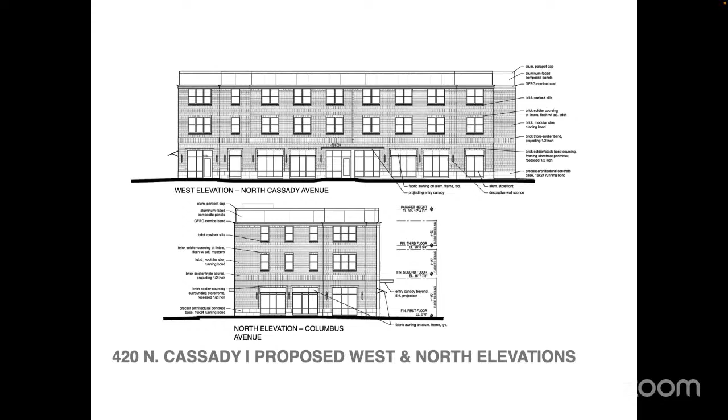So my suggestion would be to make that bottom different, if we could zoom in on that detail. Again, I'm just nitpicking here, but you could choose even a gray colored utility brick, oversized brick, in place of the precast. But there's a blow up of this.

Can I ask, is that an Arriscraft product or is it actually a precast? It's a rock cast brick. Is the rock cast actually bearing on it? Yes, so it's in line with the brick and the structural holding up the brick.

Arriscraft does require a limestone base, but rock cast does not. You can be in contact with soil, and we've done that on a number of occasions. It says precast concrete on the drawings, but that's a common mistake - it's precast architectural concrete.

Well, I don't think it's right. The issue for me is not that it could be limestone or sandstone. The problem is that when you have this used as a veneer at that level, the installations I've seen in the last decade are just not well done, and I don't know if they can't get the pieces level or not.

It's the drip edge condition at the bottom. I just think it would be to your benefit to replace that with a utility size brick that was a light color, matched the Aris, whatever color it was. I also think it gives you more flexibility for all the brickwork - they can start at the base, hide that drip edge, and work their way up. So as much as I appreciate having a belt course that's a different material, and it's not that I don't appreciate that material, I've just never seen it installed properly.